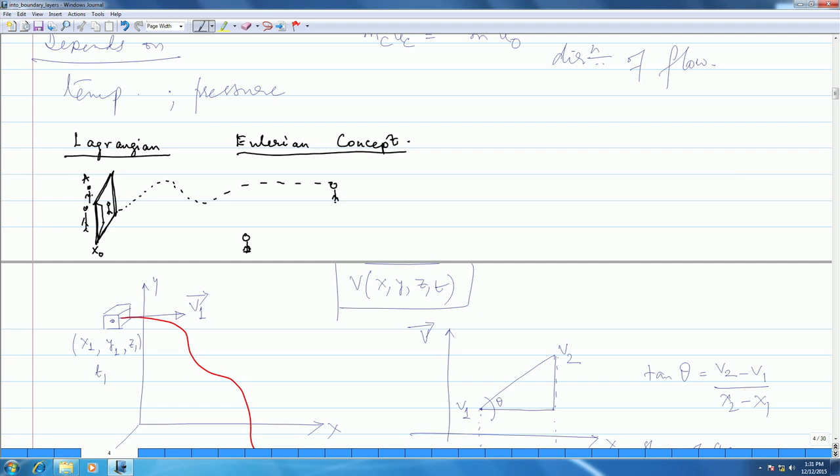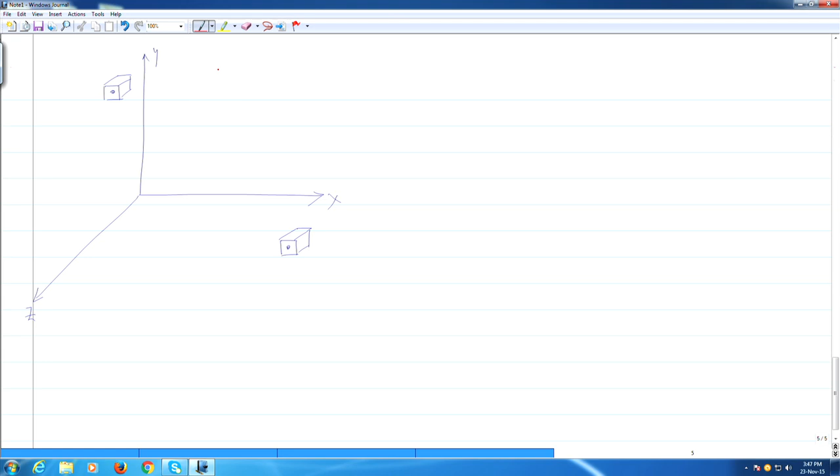Now, both these concepts are used depending on your specific need. Let us look at this. This is a very interesting thing. We're going to call this x, y and z. Now say we have a fluid element which is here, and it moves to some point here. We're not exactly concerned about the path. It could be any path, really.

So let's just say that the velocity here is v1 and velocity here is v2. This location is x1, y1, z1. Sorry, let's redo that. So this is essentially x1, y1, z1, and this location is x2, y2, z2, and this time is t1 and this time is t2.

I could have put this t1 alongside this, which essentially means that the velocity is a function of space and time. So I can write that as x, y, z, and t. So we are looking at a fluid element moving from position 1 to 2, in a way where the velocity depends on both space and time.

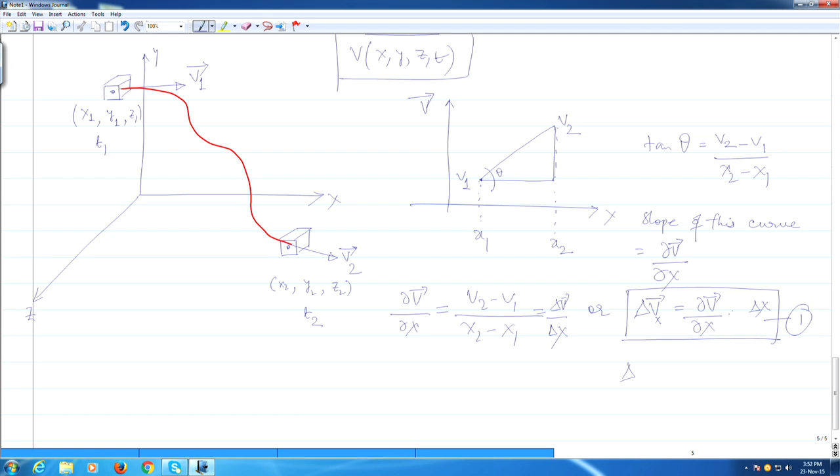So this basically you get for the x direction. So similarly we can write it in the y direction and z direction. So let's put a subscript here, say x. So then, okay, let's write it here. So delta v y is nothing but del v del y into delta y, right.

So that is for y direction, and delta v in z direction is del v del z into delta z. So change in velocity in the x direction, change in velocity in the y direction, change in velocity in the z direction, and similarly the change of velocity with time is basically del v del t, right?

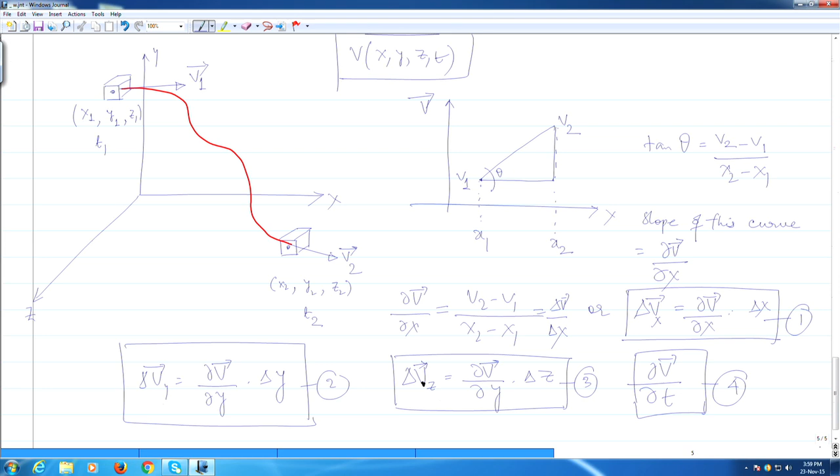So therefore, what we see is that as the particle moves from position 1 to position 2, the velocity is a function of both space and time. So I can write down the changes in space, defined by x, y, and z coordinates, as this, and the change with respect to time by this. Therefore, let us now write the total change in velocity.

So what is the total change in velocity? This is nothing but the total change in v. So that is del v del t, happening over time delta t, plus del v del x into delta x plus del v del y delta y, plus del v del z delta z, right?

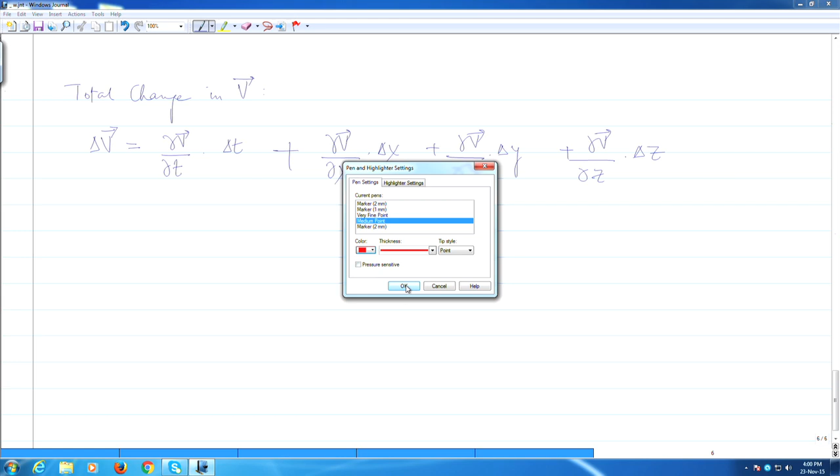If I do that, then what I'm going to do is take the delta t out and divide throughout by delta t. Just a second, okay. So I'm going to erase the t from here to save my time a little bit, and divide by delta t. Then I'm going to take limits, and say limit delta t tends to 0, for the entire case.

So what that essentially means is that this is an acceleration, right? But if you look at this, delta v by delta t has quite a few components. It's not very familiar to what you've known earlier. So we're going to actually write this as dv dt, the total change in velocity.

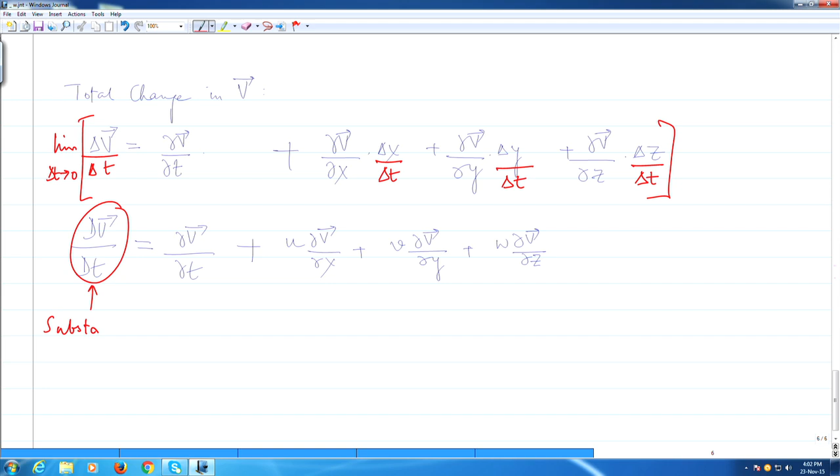And that is equal to del v del t plus, now what is delta x by delta t with limit tending to 0? That is by definition the x component of velocity, u. So I will write that as u del v del x plus v del v del y plus w del v del z. And this is called several things: substantial derivative or total derivative.

So in this particular case, we are looking at the total change in velocity. This bit is the local acceleration, instantaneous acceleration, the local derivative, and this is the convective derivative. Why? This sort of change happens only because it's a fluid, because the velocity is changing as the particle is moving in space. So there is an acceleration, right?

This is more familiar, you're probably more familiar with something like this. The acceleration is rate of change of velocity, which is instantaneous, right? So that as you change time, the velocity changes. But this, if you look at here, there is no time here, except the fact that during the passage of the time, the fluid particle itself is also changing its location.

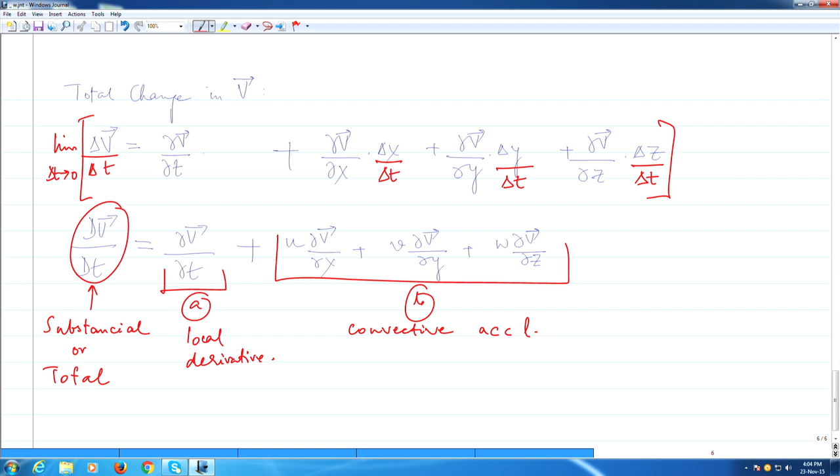And because of that, there is this convective acceleration. So it is convecting. So this is nothing but convective derivative, in this case acceleration. Now, I started off with this to explain what a substantial derivative or a total derivative is, or it's also called a material derivative.

Now I'll give you a very small example. You have a candle, you take your finger and you move it very swiftly across the flame. So this is my candle, there's a flame, and I take my finger and move it very quickly across the flame. So you feel that pinch of heat. So that is nothing but local derivative of the temperature.

So this is your candle flame. This is my artwork, I'm sure you can draw better than me. So now if I take my finger and move it very quickly across the flame, there is that rapid change, a wee bit of change. You feel a little heat, and that is nothing but this change of temperature over a small instant of time.

And then I take my finger and dip it into a big box full of ice. So then the heat that I feel slowly goes away. The heat flows from the hot source, which is your finger at this point of time, to the cold source, which in this case is this box of ice. So this here is essentially a convective acceleration.

So that is that. Now the reason I started with this is because I was going to talk about something called a Reynolds transport theorem. So I introduced this substantial derivative. Now for any fluid flow, let us say B, this we will denote, which is any extensive property.

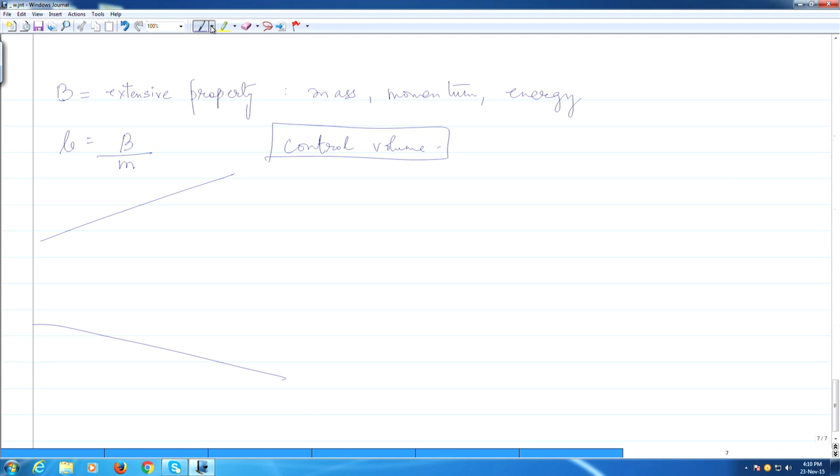But you're going to consider a big mass of fluid, and you're going to be concerned about those particles of fluid all the time, as to how they are behaving because of the movement of the ship. And which mass of fluid, which group of fluid particles you're going to consider, is the control volume. But anyway, do remind yourselves what that is. So let us look at this. We're going to consider a control volume like that.

Okay, and this is fixed, right? This is a fixed control volume. Now, my system comes in, right? The system basically coincides with the fixed control volume at time t. So this is the system at time t. I'm going to draw over this. So basically this is my system.

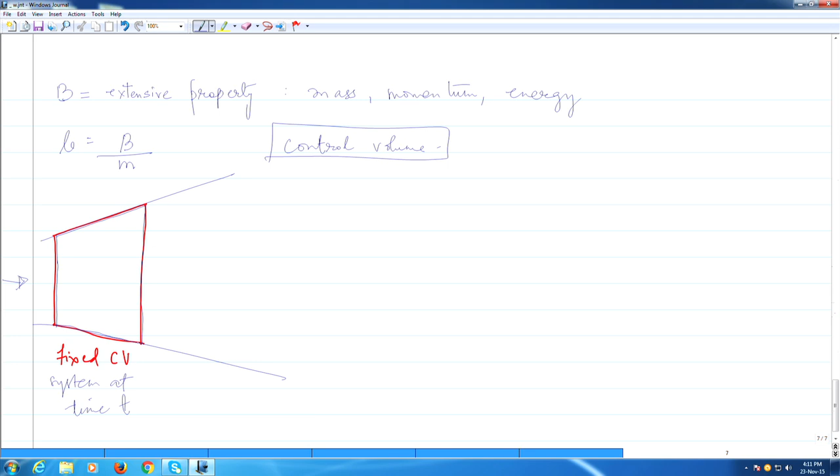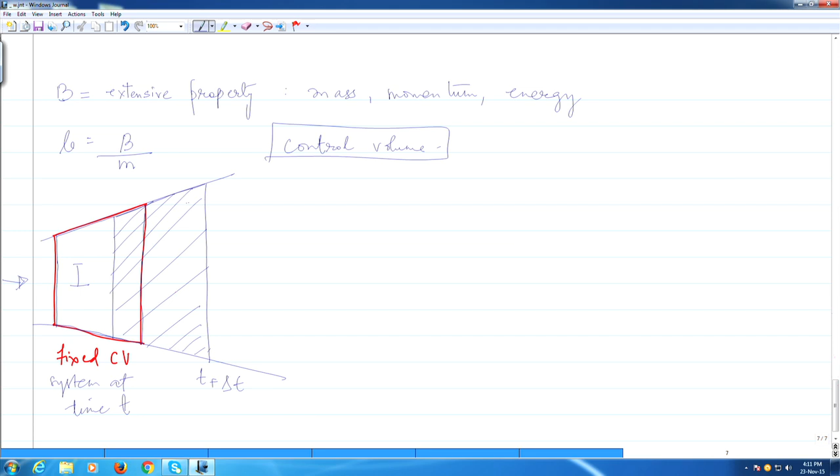So my system actually coincides with the fixed control volume at time t. The system, however, moves, and there is still some overlap, but it moves. So the system is here. This is my system at time t plus delta t. So let me call this unshaded part 1, and the shaded part between the red line and this one, let me call that 2.

So incoming, it comes in with the velocity v1, goes out with velocity v2. This is the system. So therefore, the extensive property of the system at time t is equal to the extensive property of the control volume, because it matches that. So then of the system at time t plus delta t is what? If you look at this area, it is nothing but this whole control volume minus 1 plus 2. The control volume is the red part, minus the unshaded part 1, plus 2 is this extra part.

So it is control volume at t plus delta t. It doesn't matter, it is fixed. Minus B1 at t plus delta t plus B2 at t plus delta t. So if we do this, I am going to skip a couple of steps because this is a derivation.

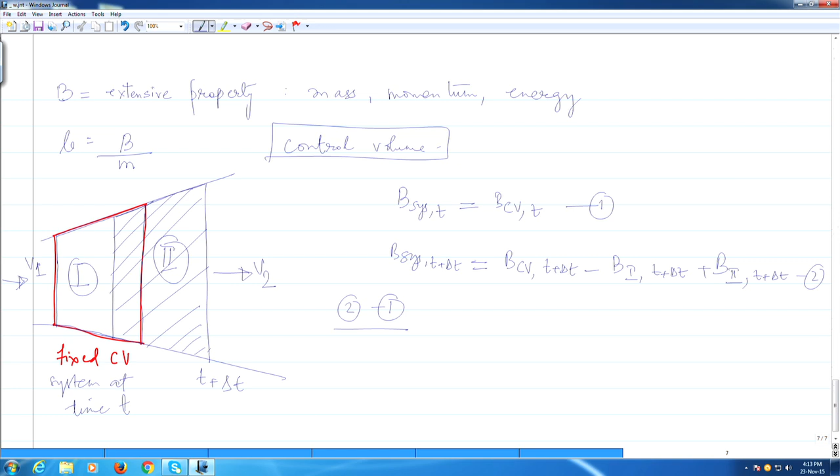So what I am going to do is 2 minus 1 by delta t, and then also take the limit that delta t tends to 0. If I do that, then what I basically get is d/dt of B system is nothing but d/dt of B control volume minus the rate of change of the extensive property in 1 and 2.

Now, we are going to just write this. If you look at this, this is the extensive property over 1 at time t plus delta t. Now, let me call this B1, and say m at t plus delta t. Because extensive property is intensive property into the mass. That is by definition what we wrote earlier.

Now, the mass I can break this down. So I can write it as b1 rho1, then volume 1, t plus delta t. I can further break this down and bring it into area. So b1 rho1 V1 delta t into A1. So therefore, if I do that, then limit delta t tends to 0.

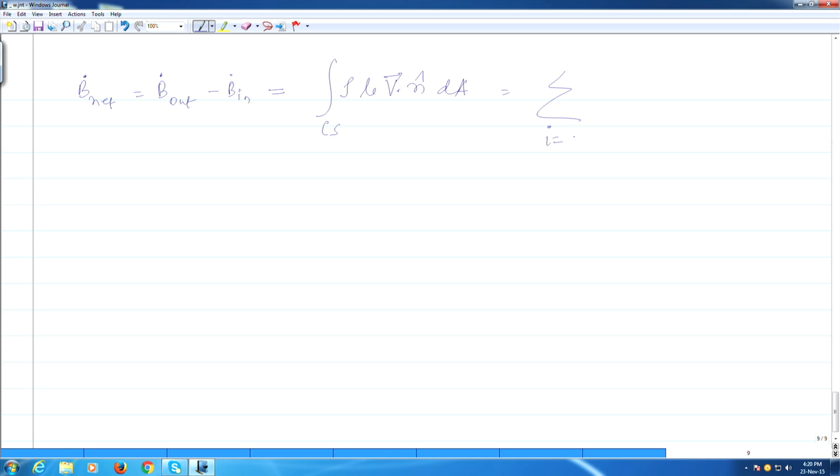I can write this out as the number of inlets and outlets. So, this one I can actually break down and sum it, I is equal to 1 to n: rho I B I V I dot N I A I.

Now, let me just do that. This is A I and this is V I. This is an inlet. This is A I and this is V I, this is an outlet. So, what we are basically saying is that for inlet V I dot N is equal to this, and for outlet V I dot N is V I.

Verify this yourself, convince yourself that what I am saying is right. Do not just believe me. So, it will automatically take care of it: for inlets this will become negative, for outlets it will become positive. That is what the directed normal is all about.

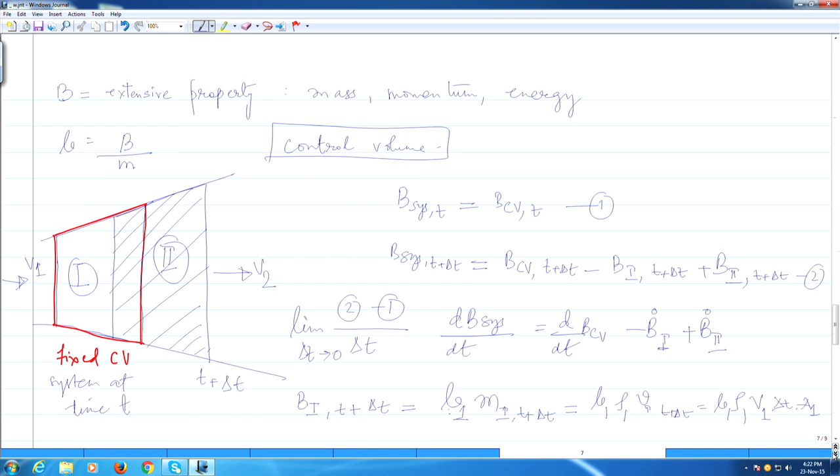Having said that, we have written the Reynolds transport theorem. Let us go back and check what we came up with. Now, all we have to do is, if the B system, the thing that I consider, is mass, then what I get out of the Reynolds transport theorem, named after Osborne Reynolds, is essentially the conservation of mass.

Then you can add to it the conservation of linear momentum. So if B system is momentum, then what you get out of the Reynolds transport theorem is essentially the conservation of momentum. I think you can do this yourself.

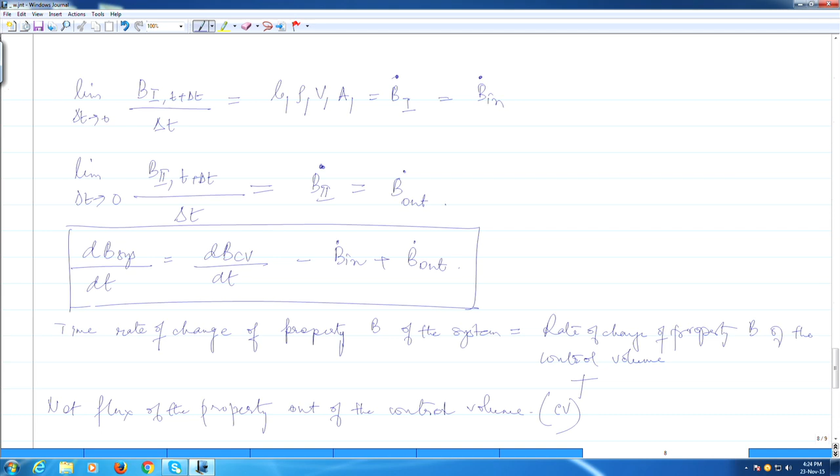For example, let me just quickly do this and we'll close. We're going to use this, and this total flux we're going to replace by the summation I just described, over the total inlets and outlets, and the remaining will remain the same. So dB system dt is dB control volume dt. And let's say B system is mass.

dm dt is equal to d/dt of rho B dV, this is the volume of the control volume, plus summation of I equal to 1 to n of rho I B I V I dot N I A I. Now for a steady case, this term shall go to 0.

Now since in this case B is m, this is equal to 1. So what we get out of here is very interesting: the summation from I equal to 1 to n of rho I V I N I A I is equal to 0.

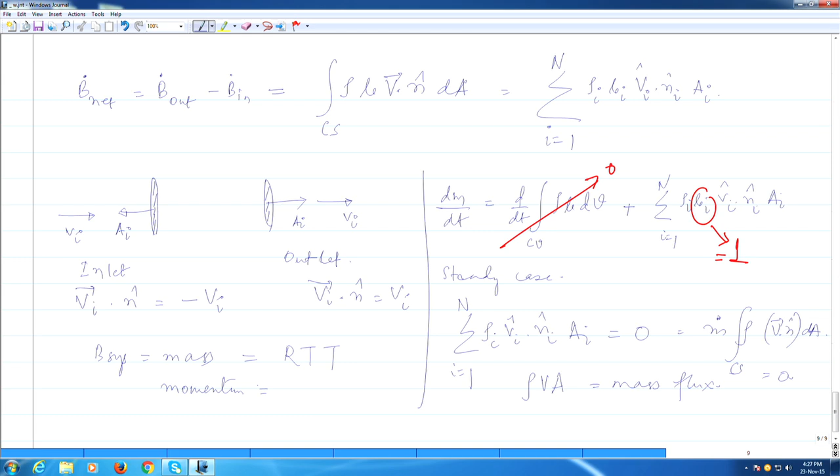So we'll stop here. This is the brief understanding that I thought I could brush up, and we will begin with concepts of boundary layers from the next module. We'll pick it up directly with the boundary layer. Thank you.